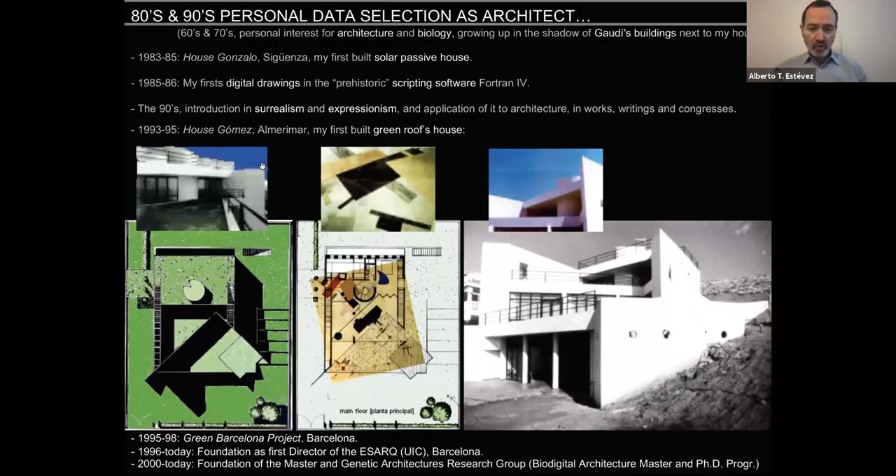As in the next slide, I explain what remains now for biodigital architecture. These words are, of course: Gaudí's buildings, architecture, biology, solar passive house, digital drawing, scripting, software, surrealism and expressionism—this gives a kind of definition and background about what you can do and how you can interpret biodigital architecture.

But the first point, or the main point, was when I was beginning the change to biodigital architecture: founding the School of Architecture where I am teaching, and later, 20 years ago, founding the Genetic Architecture Research Group and Office, and the Master of Biodigital Architecture.

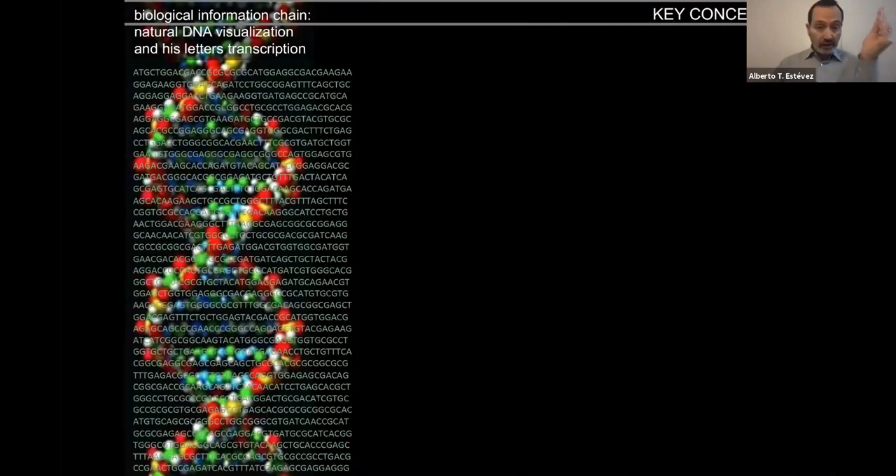So to explain what is behind all these points that we will see, a key concept is that living beings work managed by DNA chains, which at the end are information chains that today you can transcribe into a kind of code that later you can also translate to zeros and ones.

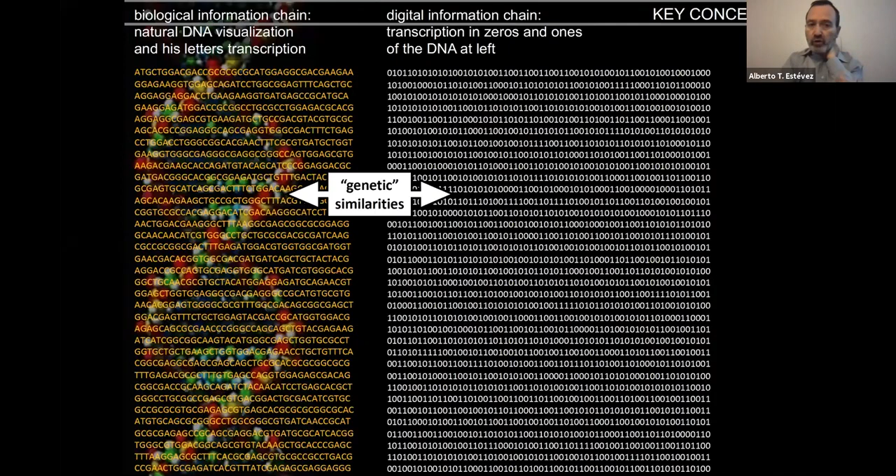So today we have something very important: the possibility to link DNA codes and digital codes. This gives us a kind of genetic similarity—living beings work or are controlled by this kind of natural software, and digital beings, what we can design and produce in a digital way, are also defined, controlled and managed by a kind of digital DNA, so to say.

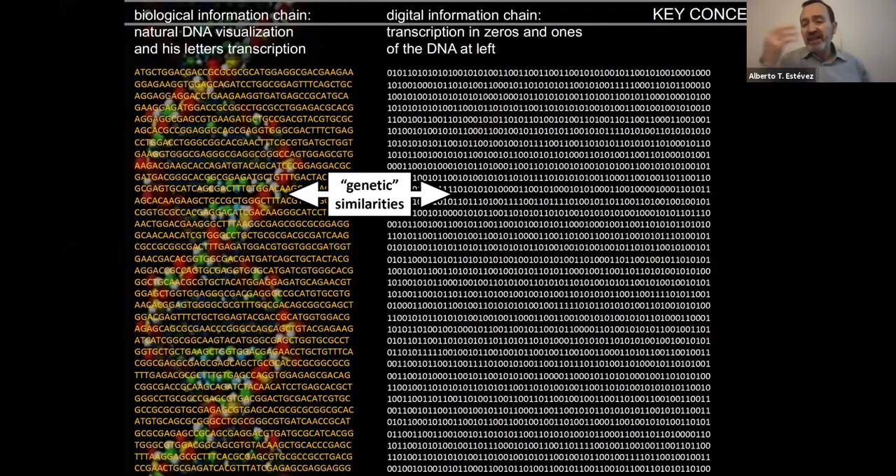This, of course, is not so easy, but it takes us to a position very, very different in the history of mankind. During thousands of years, people could only work on the surface of things. But now with genetics, we can work at the intramolecular level, so that if we have control of the order of how things grow, how things live, which functions they have, this gives a very, very big power and difference compared to what we could do before, which was only working on the surface of things.

As I tell you, it's not so easy, because you first need to have this interactome map. That means you need to know exactly which genes work with which genes to produce different functionalities. It's not so easy, of course, to control, but thanks to bioinformatics, it can be done.

It's only a question of research. So understanding these two points: the possibility to work with bioarchitecture, living beings that grow in the way we need for our purposes, and also knowing how we can manage digital architecture, designs that digitally can produce something with machines, with CNC machines, with 3D printers, etc.

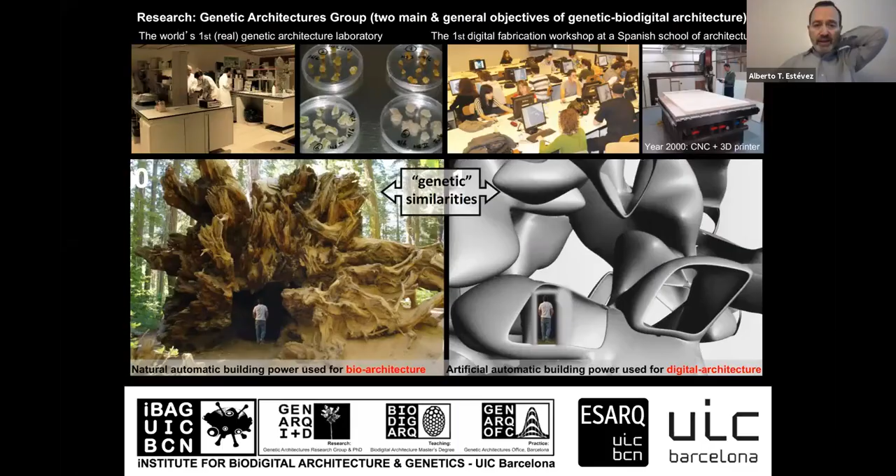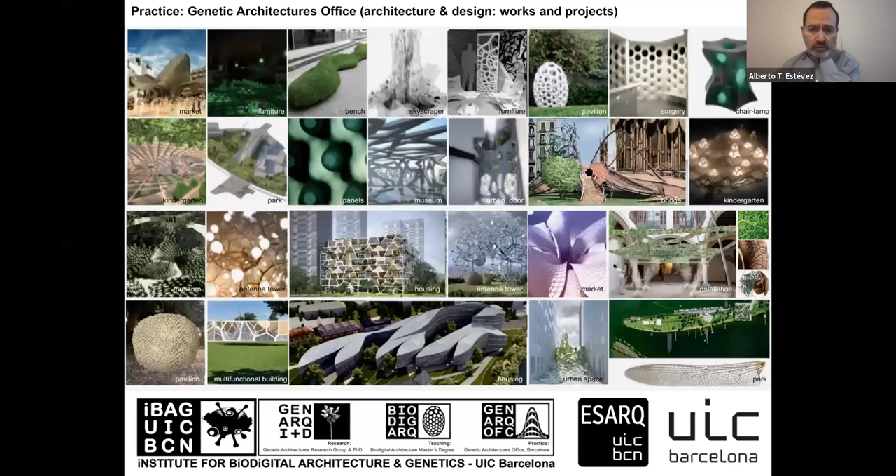From one side, in the office as practice, as architecture and design. Here a lot of little images of projects: a market, furniture, benches, skyscraper, pavilion, bridge, door, museums, housing, etc. And also from the research and from the practice, we are teaching in the Biodigital Architecture Master.

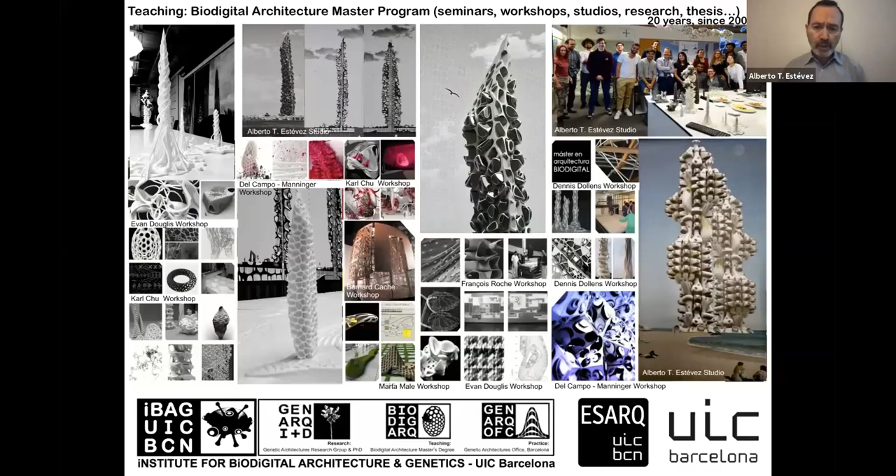I want to tell you about this institute, the Institute for Biodigital Architecture and Genetics, which has three branches: the branch of research, managed by the research group Genetic Architectures; the branch of design practice, managed by the Genetic Architectures Office; and the teaching branch, the Biodigital Architecture Master. These three points are what we are doing in Barcelona, following these ideas.

And of course, we are in Barcelona, so the big advantage is that we have Antoni Gaudí and all the works of Gaudí, and Salvador Dalí, who described the works of Gaudí as really a kind of surrealist architecture. We also have in our institute philosophers speaking about the emergent character of life, about complexity theories, geneticists about genetics, and of course sustainability as the main justification for all this.

Understanding that our cities need to take advantage of this power of nature and this power of digital technologies, this is what we are working on now.

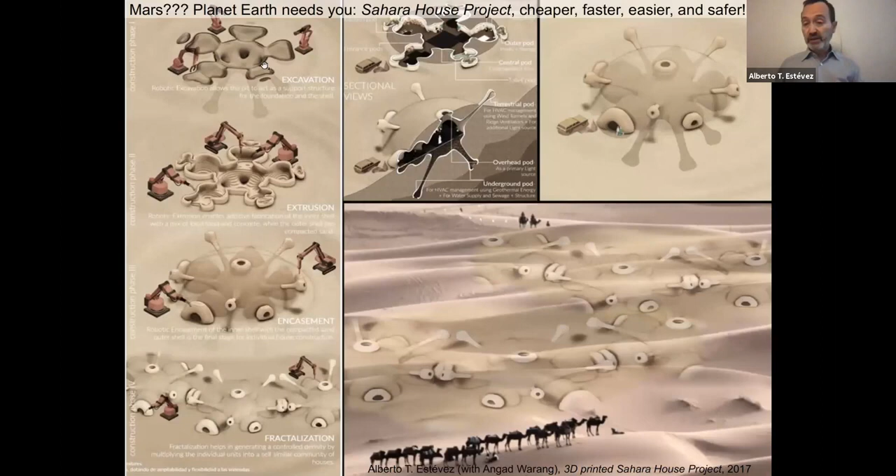In this sense, we were making a little project about 3D printed houses, with the same resources that a colony on Mars would be built with, the same technology etc., but 1,000 times cheaper. We were making this project for building houses in the Sahara, for example.

Because the point is, if we don't begin to think how to really solve our problems, not thinking about problems that are not so close to us, what will happen with our planet at the end? You see the movies Blade Runner 1 and 2, that are prophesying a kind of planet that will really be in trouble if we don't begin to do things that solve this. But now this is happening all over the world.

This is the city of Mexico in America, this is the city of Hong Kong in Asia, this is the city of Barcelona in Europe. Everywhere we have the same problems, and sometimes our problems make travels to people that are very, very ecological.

For example, in New Zealand, the most ecological country, they cannot go to the beach without all the clothes, because the ozone hole is exactly in the position of New Zealand, and they have the highest rate of skin cancer in the world. So our bad behavior toward the planet goes to other places that have better behaviors.

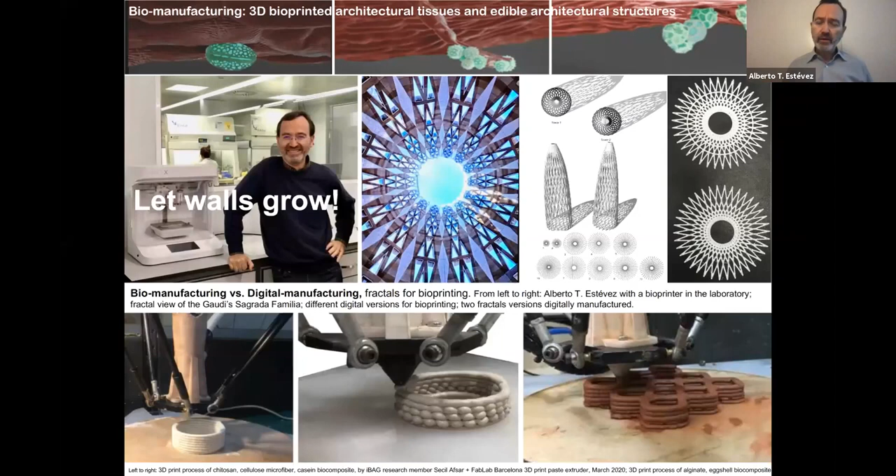In this case, it's Professor Yomna Abdallah, who is working with me very closely researching these points. And here we also see the possibilities of working with edible materials, so that we can also think of edible architecture.

All this, I was proposing these comparisons between what was normally proposed in the 20th century and what we need to propose in the 21st century.

So in this case, it's a sporopollenin house. That means that sporopollenin grows as a space, a house that can be habitable, taking into account that sporopollenin is the most durable organic material that grows by itself.

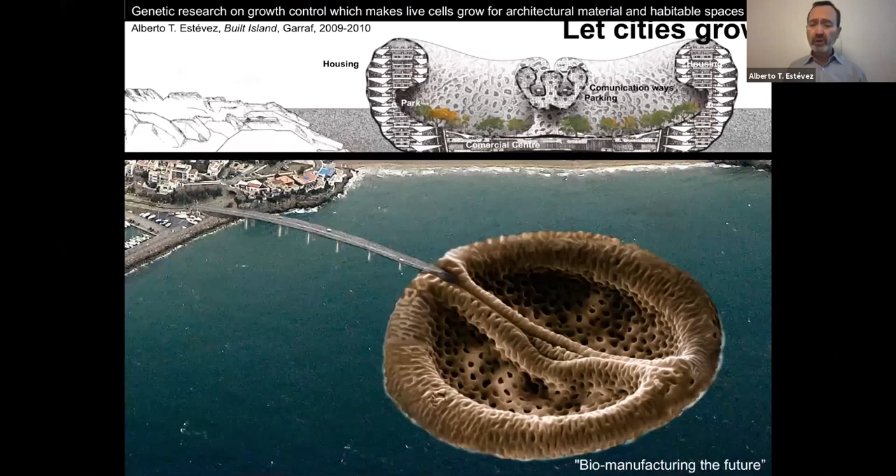So it can be a good understanding of this idea, letting houses grow with the power that nature gives us, letting cities grow, whole cities, or even letting planets grow, because now with genetics we can think of research that includes not only building with living cells for walls, houses, cities and landscapes, but also making satellites of living cells around.

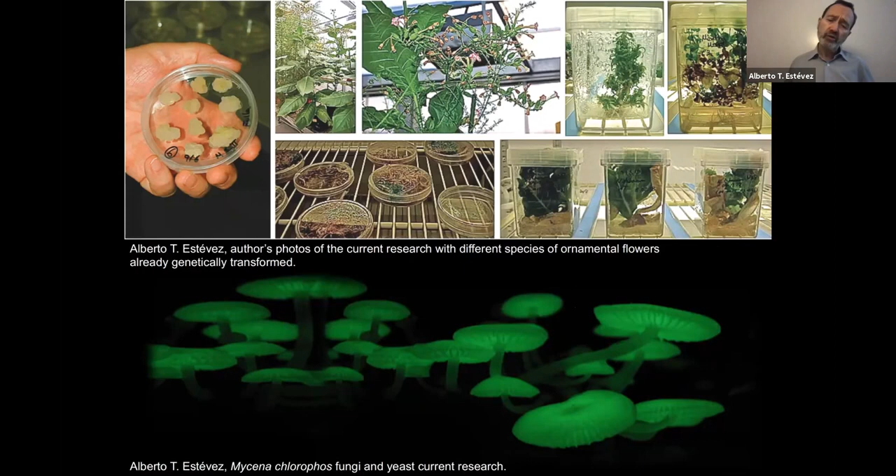And a third phase was working with the genes of this bacteria, but putting it in ornamental plants, so that we can have at home or in the balconies or in the parks, plants that also give light in a natural way. And a fourth phase will be using the genes of the most luminescent being that exists, this fungus, whose genes responsible for luminescence can organize better illumination for what we need.

Of course, also with the challenge to build beauty, because as architects and designers, what we need to do is make people happy with buildings that are beautiful. If not, it's making a bad behavior for us as architects. So this is the idea of knowing the secret laws of the universe, and applying them to architecture and design in our case.

This takes me to use the electron scanning microscope, and so I was researching the microscopical structures. The point is that the amorphous forms of cells begin to organize into structure. So the first structure of how cells understand that they need to resist external forces are these that you can see with the electron microscope.

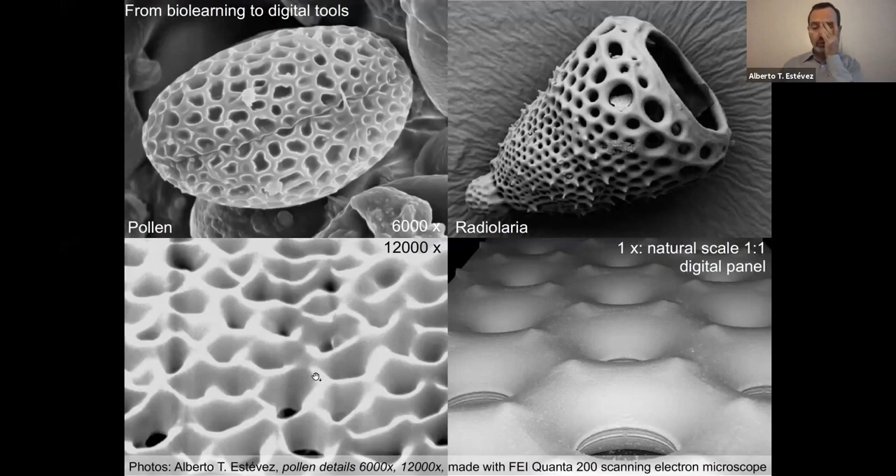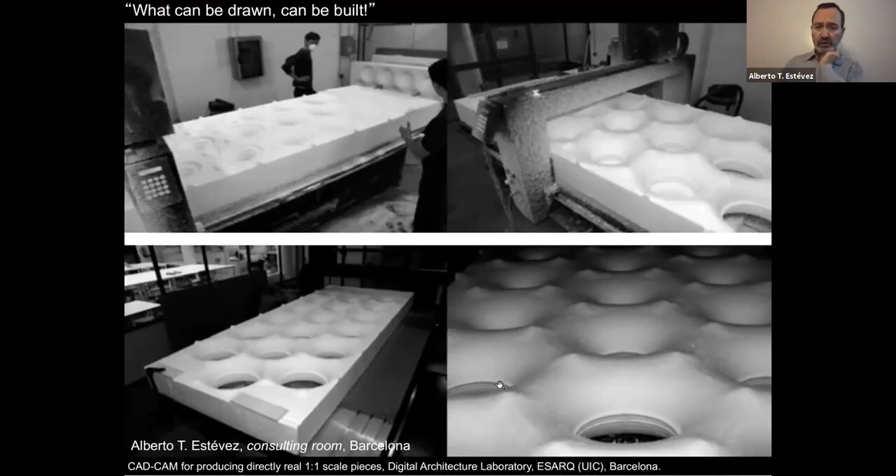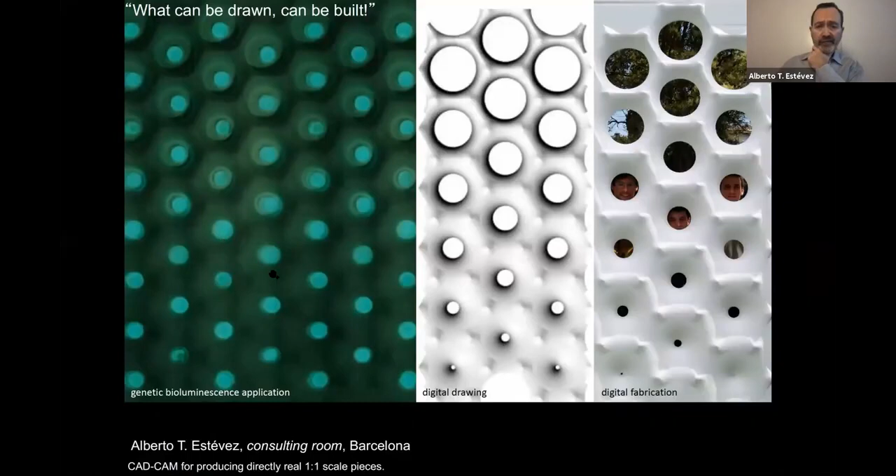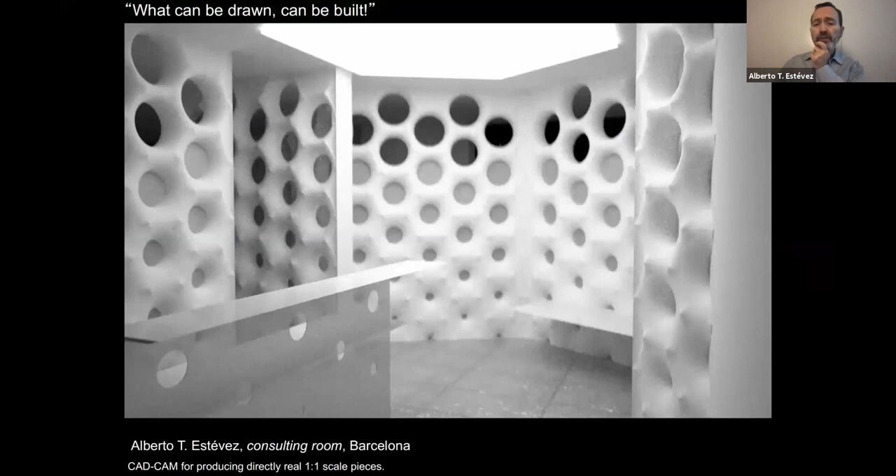I was researching, for example, structures of pollen, and later trying to digitalize it and to print it or cut it or fabricate it with digital machines. In this case it was a kind of panel that was applied for a consulting room. And here at left is the same panel with the bio lamps I was showing you before. The consulting room was organized with these panels manufactured by CNC machines.

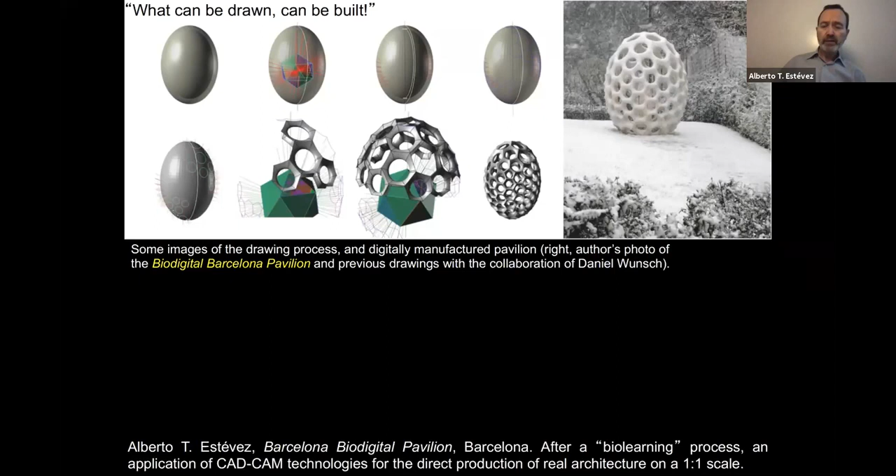And also later trying to do a pavilion using the same understanding of pollen and radiolaria structures. It's curious to see that vegetables and animals have, at the end, the same microscopical structures, and the same non-microscopical patterns that are equal for all living beings that you can find.

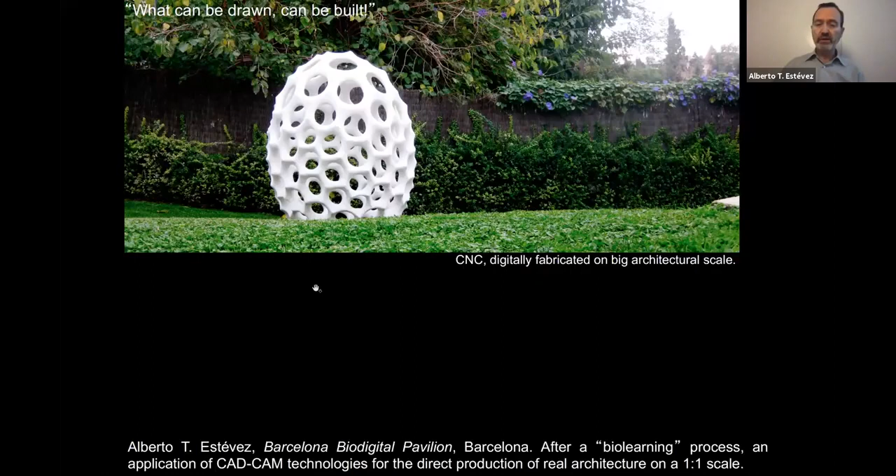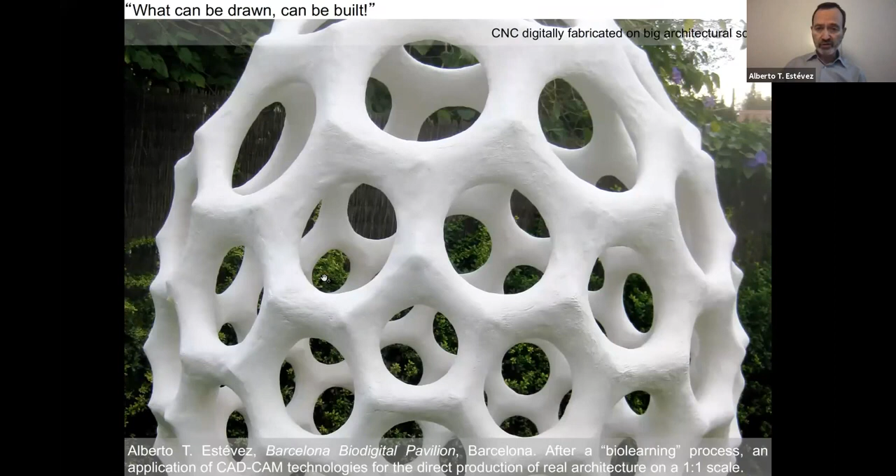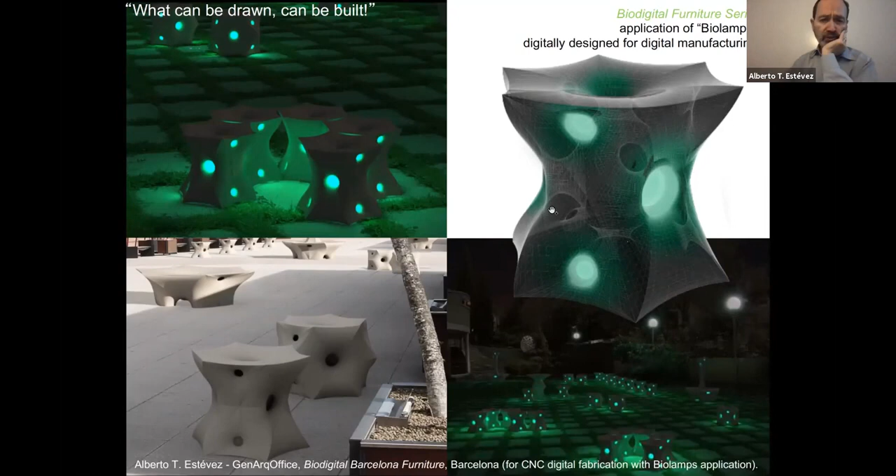And in this research, we were also producing this little pavilion digitally, with the advantage that digitally you can scale it to different scales. So we were also doing little lamps, a series of digitally fabricated lamps, but also I began some years ago a series of furniture for 3D printing. And as you see here now, 3D printed, in this case in the garden of our university.

The point is that all this series, as you see, has a kind of complex geometry that in the end you can only imagine, design, or produce if you are doing it digitally. Here we have what I call the radiolaria furniture series and the hyperboloid furniture series.

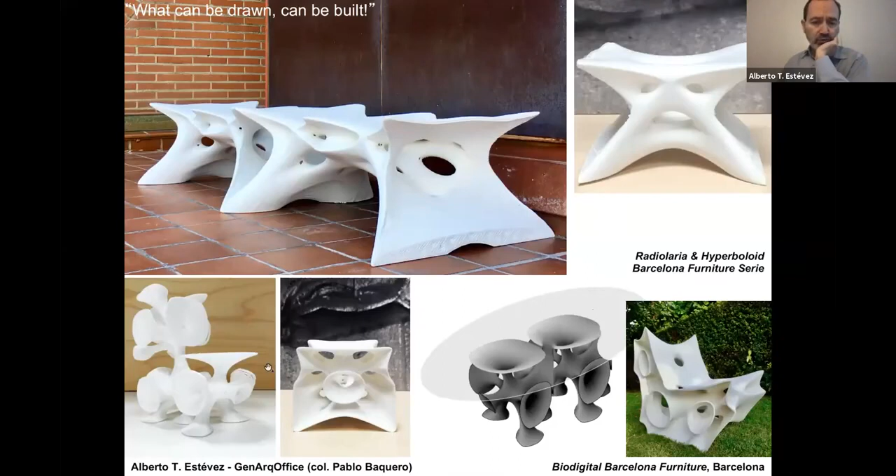And this is related to what I was saying in the first slides, when I told you to hear the zeitgeist: what's happening in our times, with which technologies, ideas, and concepts we are counting on, and what is the challenge to take a step forward to the frontier of knowledge, and not to be too comfortable working as 100 years ago Mies van der Rohe and all the modern architects were doing. So this is our challenge: to see what are really the designs and the architecture that our times need or deserve more.

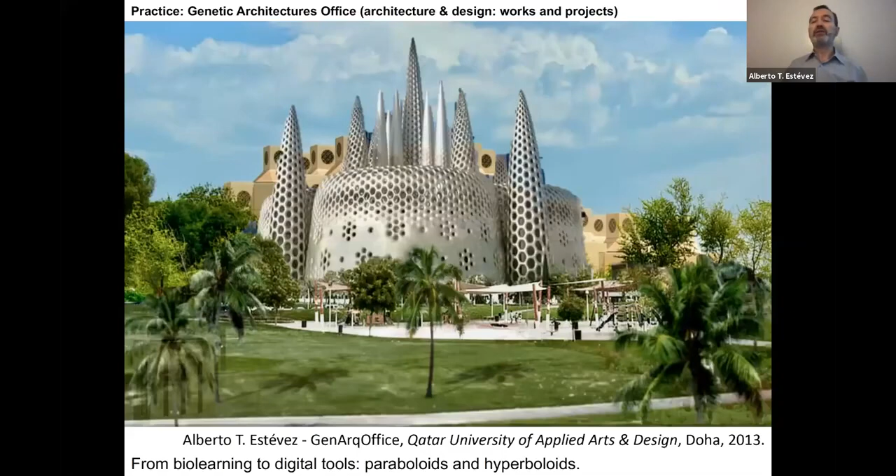And in this case, this takes us, of course, to geometries that can only be managed by digital tools. And what digital tools allow you, this is what you can really propose.

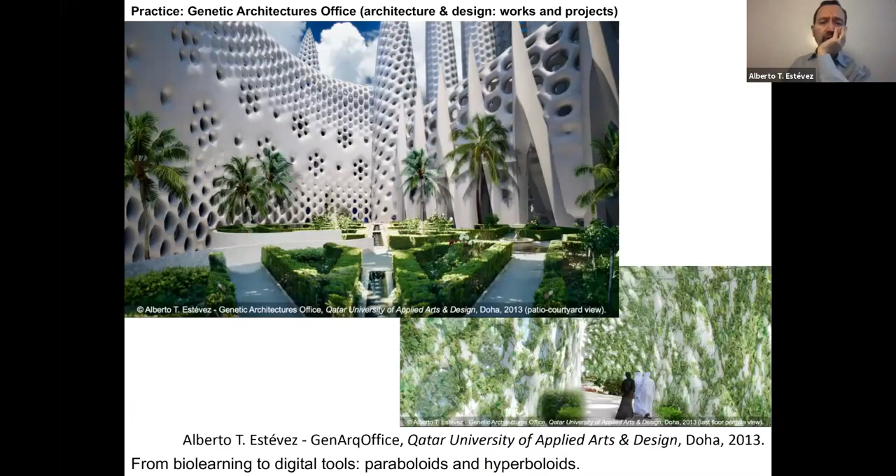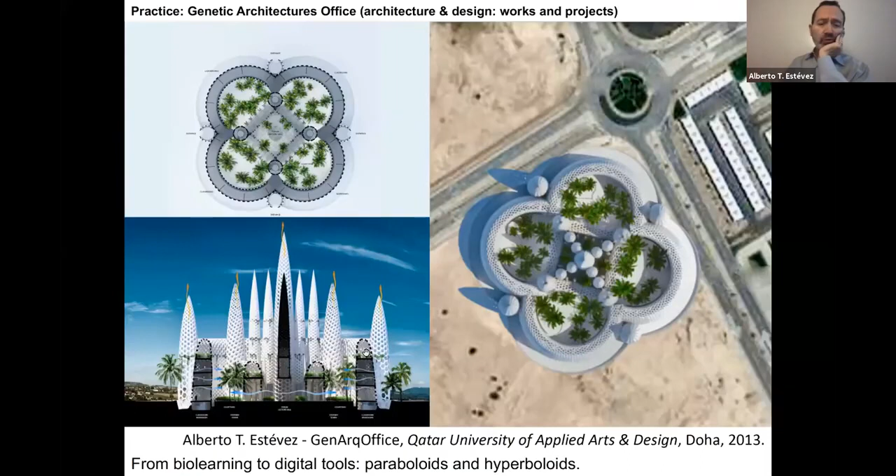This was for a university there in Qatar, and that was inspired by a little drawing of Gaudí that was making a kind of little schools for in Tanger. But from this drawing, we propose a more actual project.

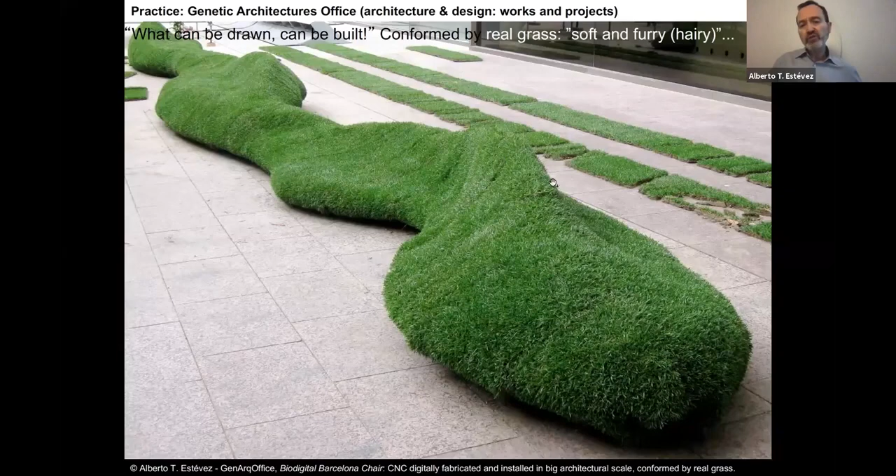And here another bench that we were producing in this idea of what can be drawn can be built. So at the end, if you are able to draw something, you will be able to build it. And only taking it as what is the most tension that you can introduce in the concept of things. And in this case, also mixing with real grass, so that the point is very comfortable, that the people can sit, can sleep, can rest on real grass benches.

But if you think that everyone is in different positions, and you take all these positions together, and you make a fusion of the positions, in a way that only digital tools can do. So you have, again, this step more, as the hyperboloid chair that I explained to you before, that only with digital tools you can conceive, you can design, you can think, you can manufacture these designs.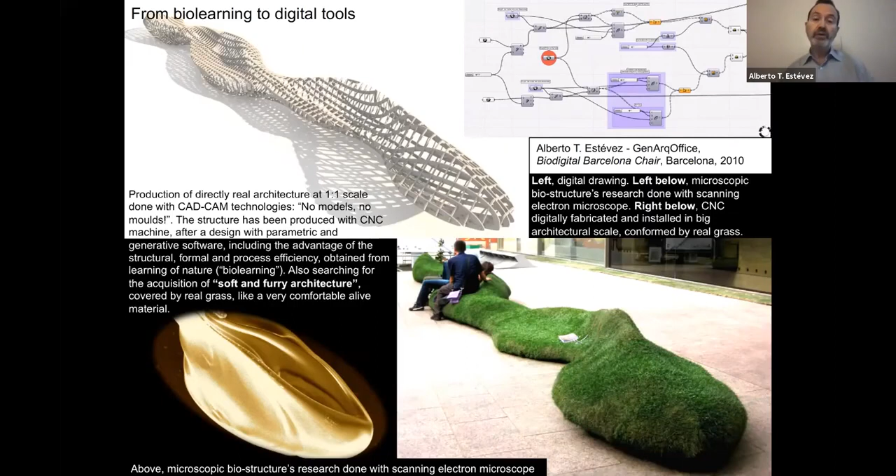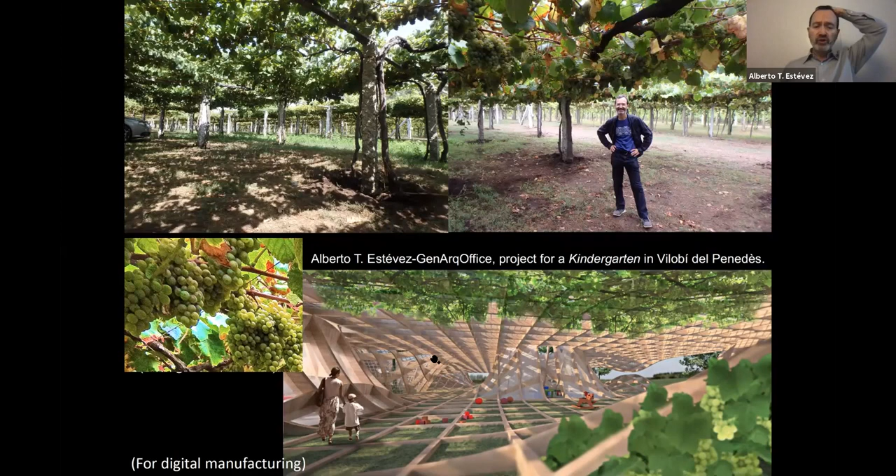Another building was this kindergarten that was in a place of wineries, very famous for wine, and taking the fruits for the wine, the grapes, it's this way to put it as a kind of roof. And I was thinking that it could be a nice environment for the children to have this roof, and also take it from the structures, the microscopical structures.

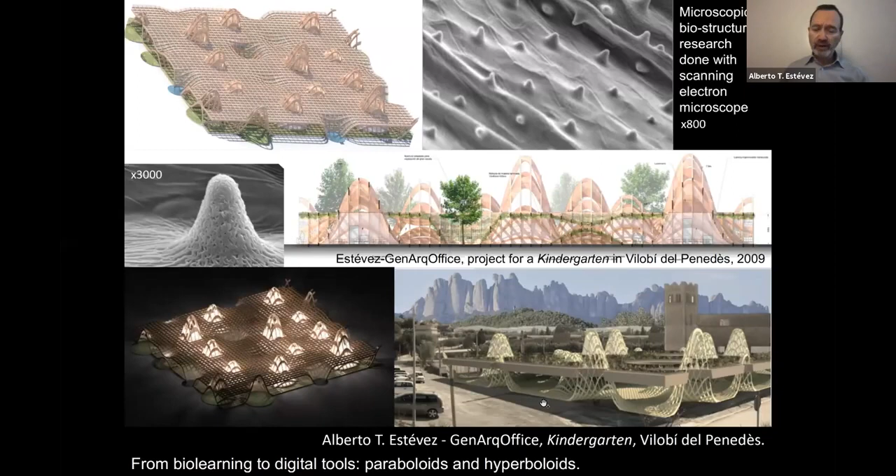In this case it was from a kind of leaves that give us the possibility to think in spaces, in paraboloid spaces, and in the middle, this green roof of grapes, in a way as the Montserrat mountains that we have close to Barcelona are also doing in stone. So it's a kind of relation of this digital manufacturing structure for the children.

And we were proposing to the architect director of the Sagrada Familia, and he liked it a lot. But let's see, we were proposing all these designs of paraboloids, hyperboloids, etc. That also digital tools allow us.

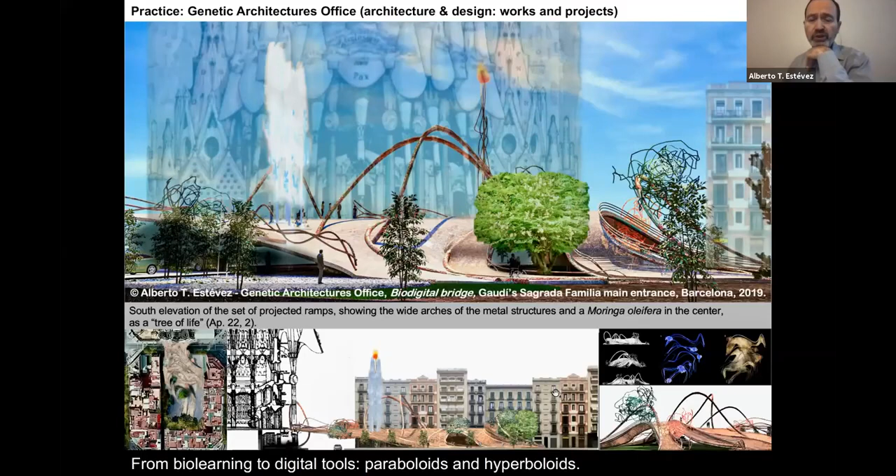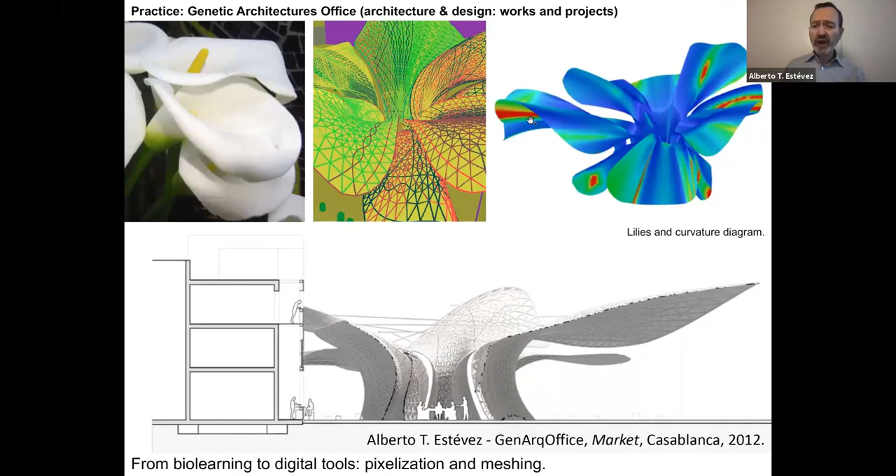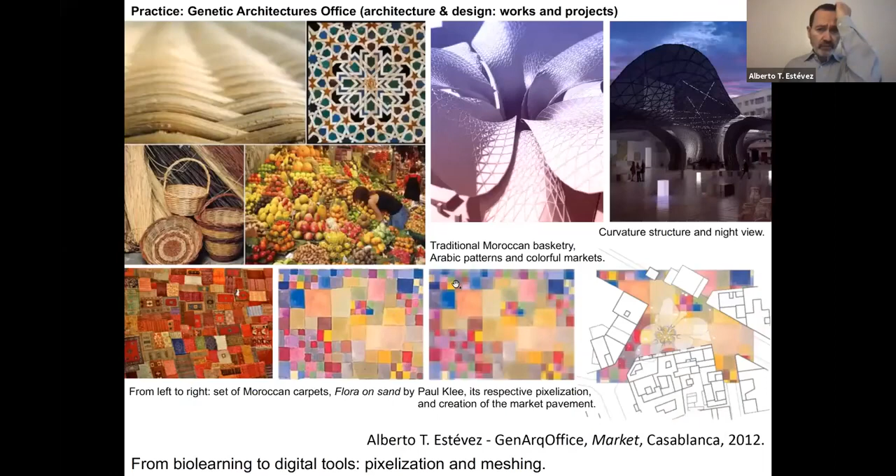And also organizing this with this kind of canopies with tensors, so that this basketry type of canopies, as lilies for example do in nature, are more interesting to have a free space around, as you see here, to have a big free space, and with these basketry canopies provide the shadow and make the space.

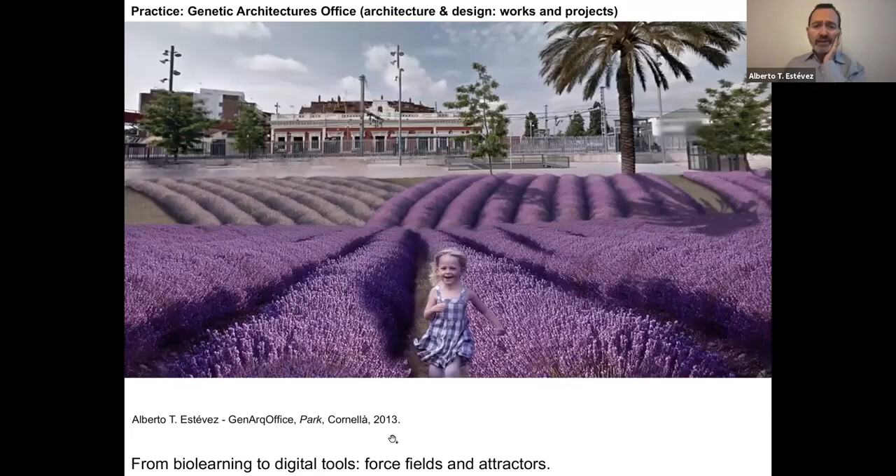Another project, in this case with other possibilities of digital tools, organizing designs with force fields, with attractors, was a park in Cornellà, close to Barcelona, that again, as you can see for example in the grain of wood, how these lines are so similar to magnetic lines, and how digital tools allow you also with these attractors to organize an absolutely harmonic design.

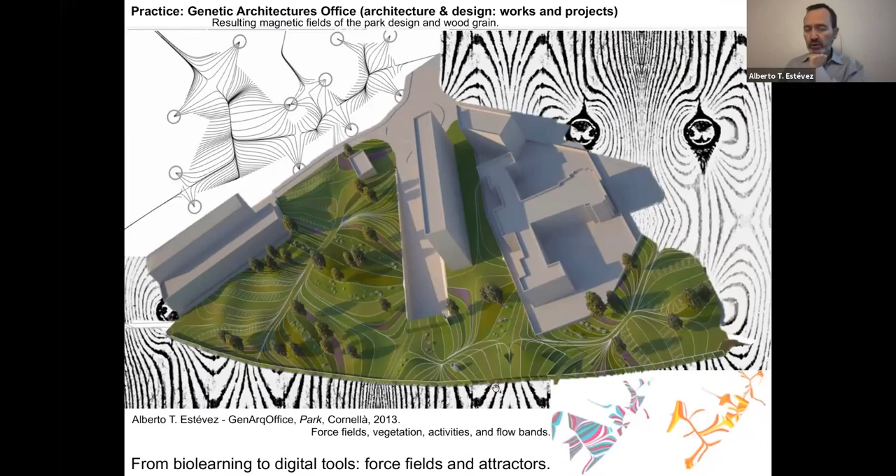So of course, following the vegetation or the activities, the flow bands that are organized here, or the organization of the parts or of the ways, but being sure that every line, every little curve here, because it's managed by digital tools, has an intrinsic harmony in all of them.

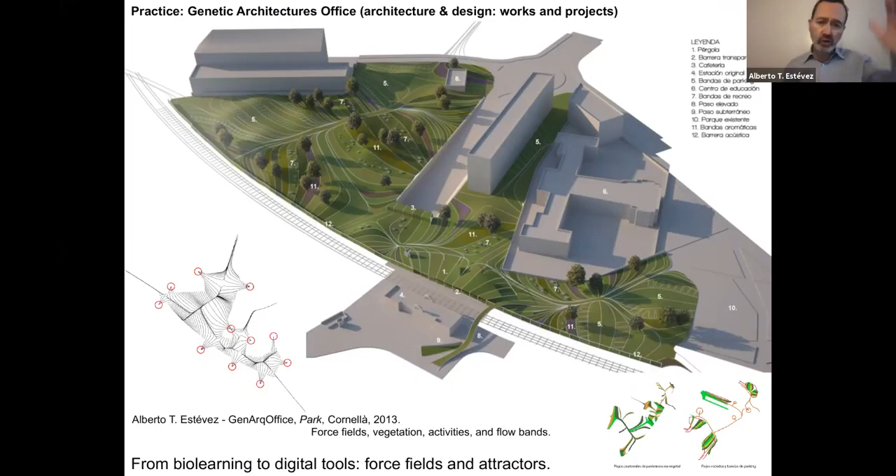This is a big advantage of digital tools: we no longer need to be Michelangelos or Gaudis to make something absolutely harmonical. We only need to use digital tools and the possibilities that digital tools offer us.

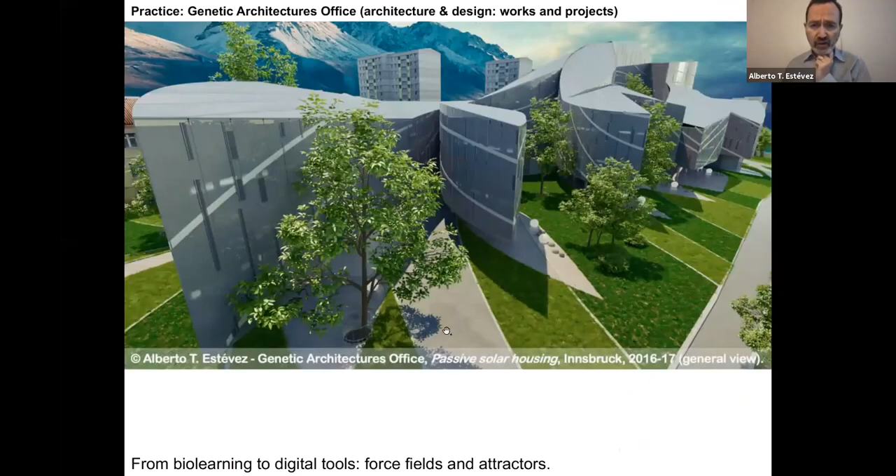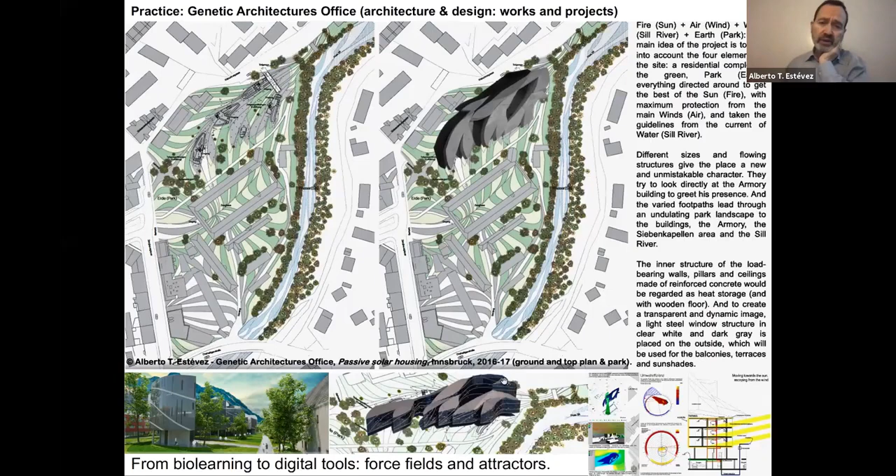Also with force fields, I was organizing this solar passive housing design and all the park around, so that how the park and the green flow is how these housings also come, following the sun, searching the sun for every apartment to have a winter garden with the possibility of passive solar housing.

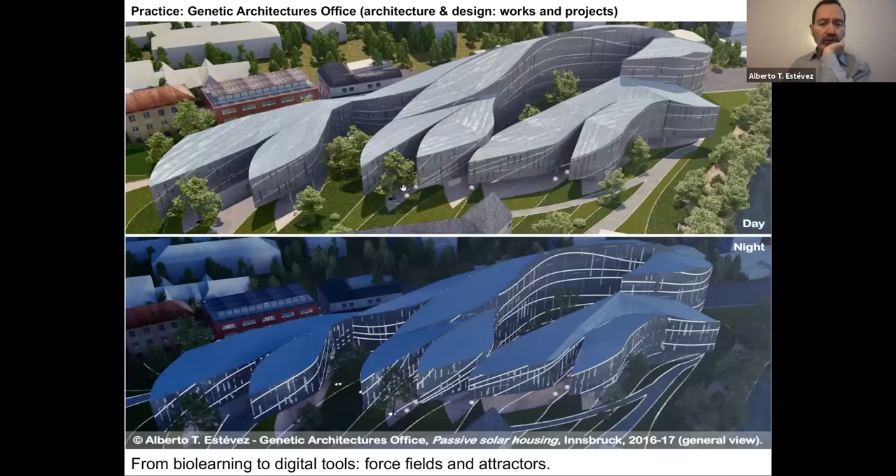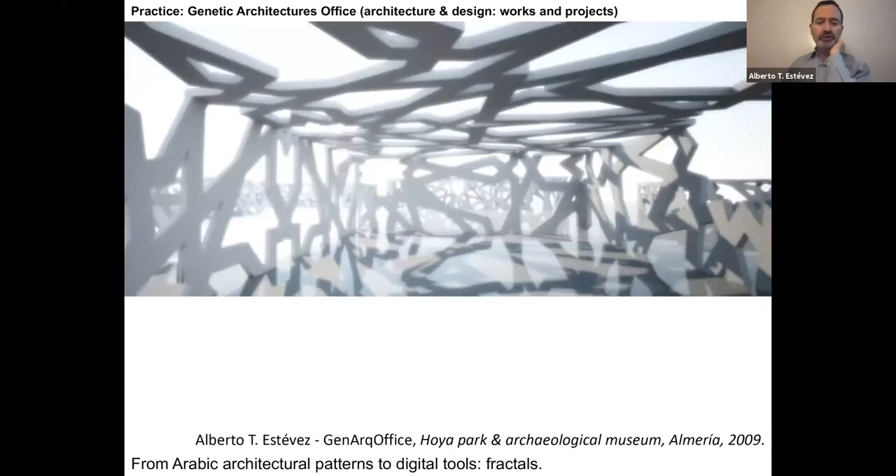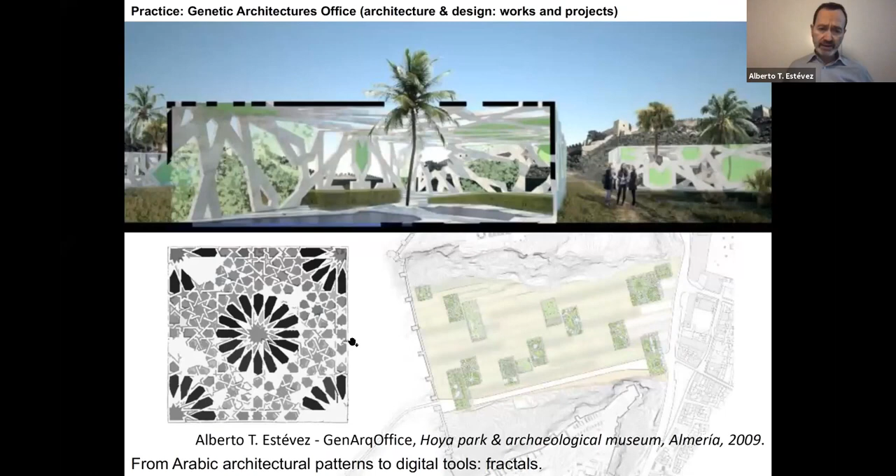Another design was for this museum, using the possibility of fractals, because Arabic architectural patterns give us a kind of fractal geometry. This case was also a big park with archaeological sites that we needed to preserve, organizing little pavilions to preserve these excavations.

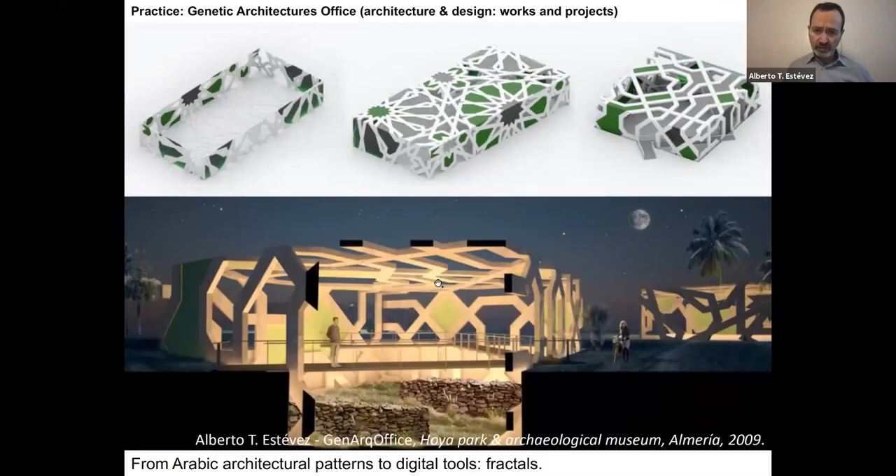And all was organized by these patterns, with the idea of fractality in the geometry of Arabic patterns. Now another possibility with digital tools is fractals, because fractals are common in nature too. Everything in nature is organized in fractality - the big forms follow little forms that follow microscopical forms, and with three levels of fractality, nature arrives at a very efficient structure.

In this case, we were designing a kind of telecommunication antenna. Normally antennas are vertical towers, but in this case I wanted not a vertical tower but a kind of light crown. By night it will be illuminated, and by day these balls are solar collectors, because the idea was to organize not only an antenna but a self-sufficient fractal machine for purification of air.

The point is that first there was a study of fractality of this plant, the diente de león as we say in Spanish. The fractality that we can see in this little plant was reproduced in 8 levels, following the law of fractality until having a whole dome.

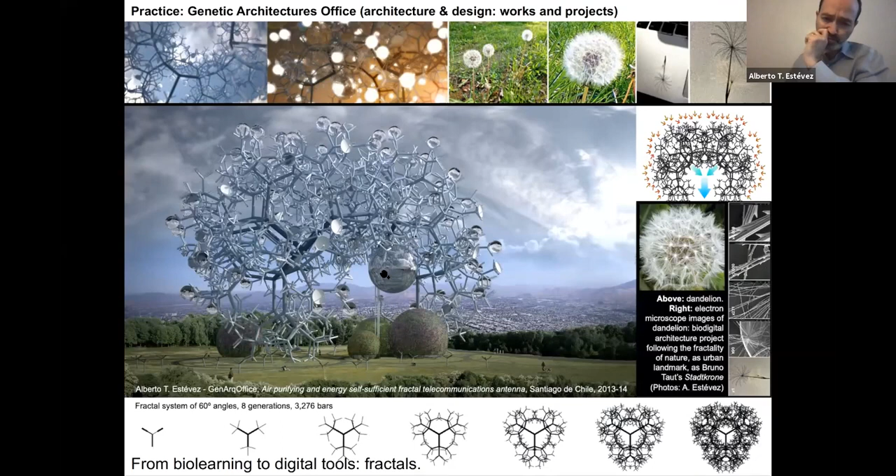Of course, it's not to arrange all the contamination of the city, it's only a kind of symbolic machine, taking the air through all these tubes, with filters inside, having purified air in the middle, where people come to the restaurant to see the views from this mountain, etc.

But we go now to another kind of possibility that digital tools allow us: Voronoi. Voronoi is really a fascinating kind of structure that allows efficiency in structures, in behaviors, in functionalities of plants and animals.

You will see that plants and animals at all levels of scale have the Voronoi pattern. For this design, a multifunctional building and park in Austria, I was taking the idea of Voronoi to organize diversity, spatial richness, hierarchical paths, as we learn from nature - this is all the time the sentence I put below: from biolearning to digital tools.

With biolearning, learning from nature, nature teaches you this kind of harmonical organization, a more efficient organization with hierarchies in the structure - a primary hierarchy, a second hierarchy, what is organizing surface, what is organizing structure. This lets you organize something more complex thanks to digital tools, and complexity takes interest and attraction for human perception.

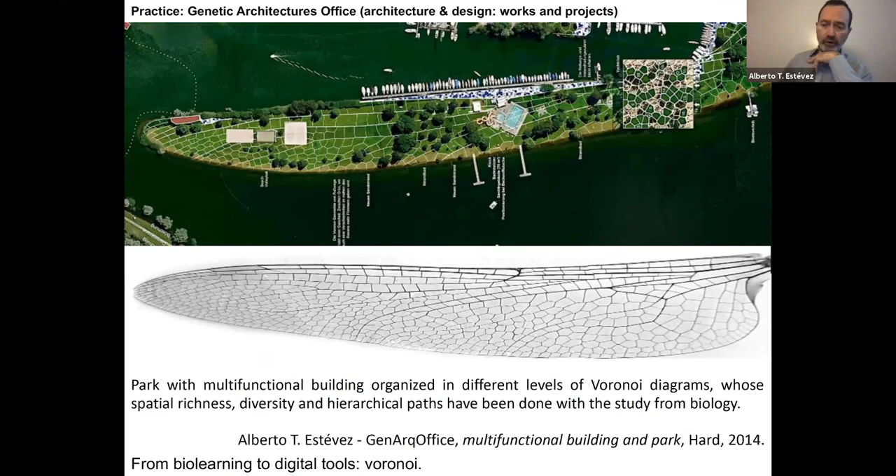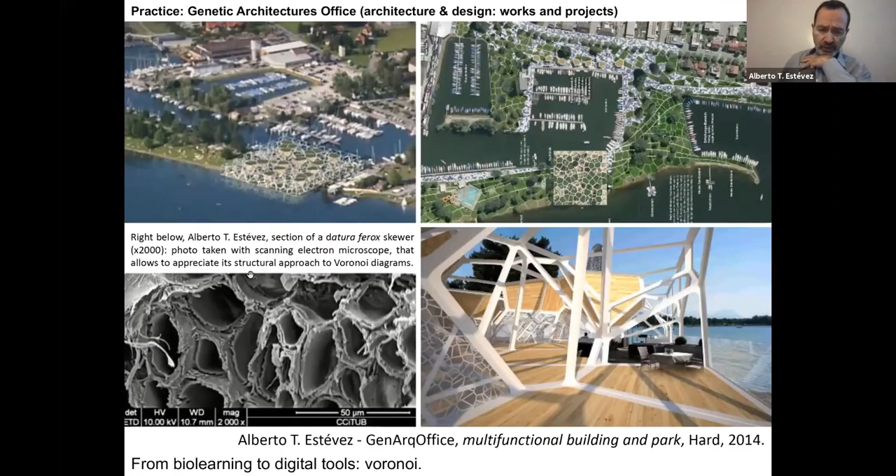In this case it was also the whole organization of the streets, the squares, the haven, the port, and also the building, every time looking with the electron microscope to the Voronoi structures. With the same Voronoi idea, this design was also solar passive housing, organizing this whole building from one side as Voronoi structure, but also as a self-sufficient house.

So to say, as was the antenna, because for sustainability we need to think that everything we do, we need to implement in self-sufficiency.

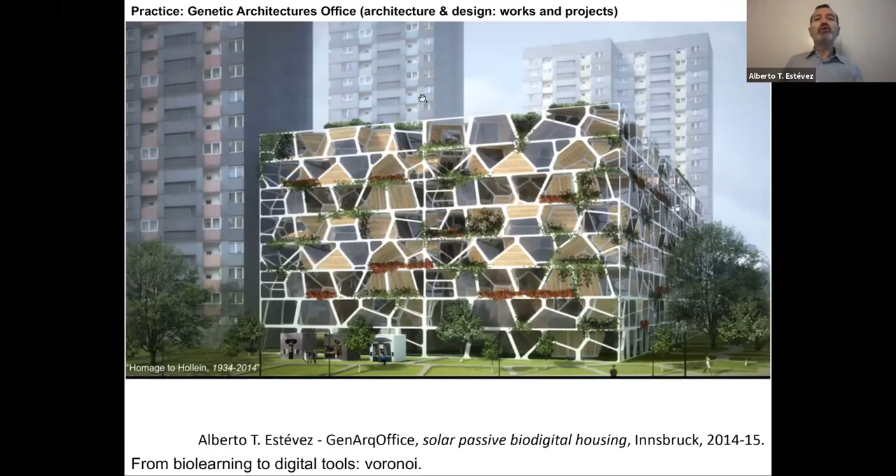So in this case, using urban agriculture, urban beekeeping, and having little shops to sell the flowers, or the vegetables, or the honey that the bees produce, all in this building, which in the middle has hanging gardens, and here also the diagram of the solar working.

Here you see the different Voronoi structures. In this case, from a rose petal at 800x magnification, or here of pollen. You see that for surfaces like a rose petal, or for pollen, it functions very differently - one is on a surface, another is a volume. Or here, if you cut a section of a cactus, you can also see the three-dimensionality of the Voronois inside the Voronoi tubes of the cactus.

So this gives you the idea of how we need to think about our structures, since nature is telling this to you.

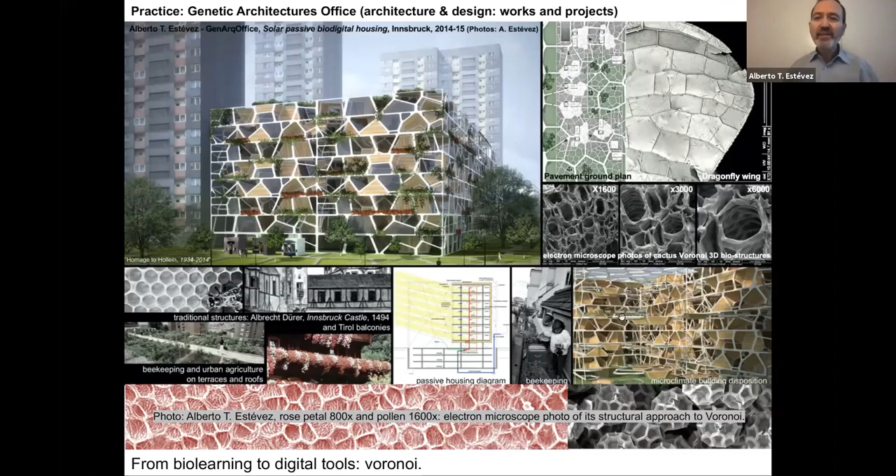Someone is, but I don't know how to do this because someone is calling for questions. Maybe it's better we finish and we have the questions.

Also with Voronoi, I was designing this market. In this case, for Peru, for Lima, you see here also the fractality of the leaves with 3 levels of Voronois, organizing with the idea of the stomatas, which is how leaves are breathing.

So in the same way, we organize a full market that is organized with agricultural roofs, where you can sell in the shops, but everywhere, as you see, the shops are around patios, specialized patios, but also between the shops are the smaller patios.

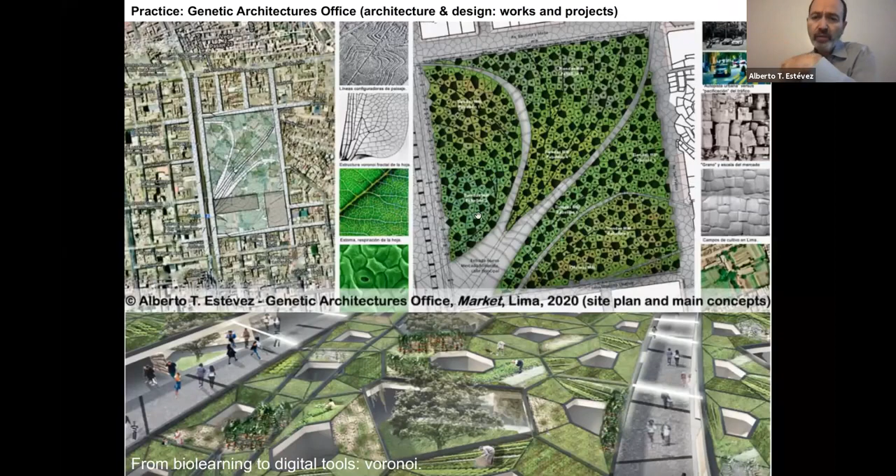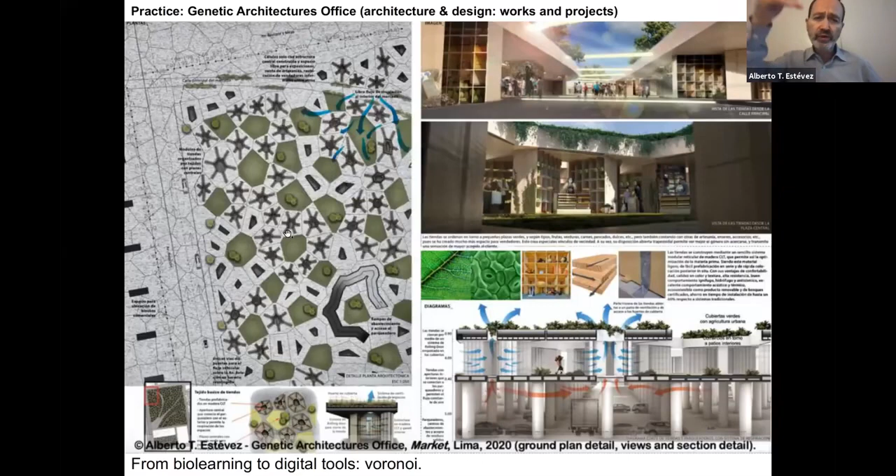For bread. So we have a kind of structure, as you see here, with shops around little patios to oxygenize, to have the circulation of air from the bottom of the parking to the roof, so we ensure everything is very good with the air around. There are little patios, but also bigger patios around for more social possibilities, with different organization levels of fractal Voronois, as I was explaining to you.

And now also we are in the last part of this little speech.

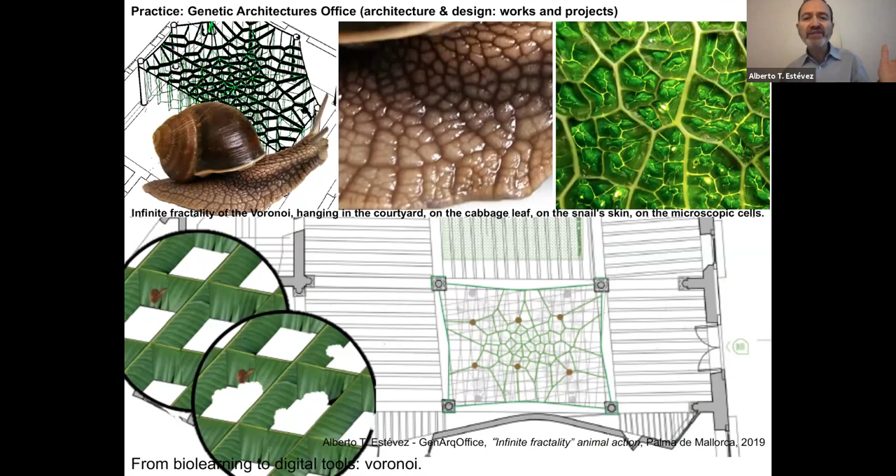So this fractality that we call in the installation 'infinite fractality' - we let the snails begin to eat here, as a way to explain what will happen to us if we don't begin to think about where we are, which is our environment.

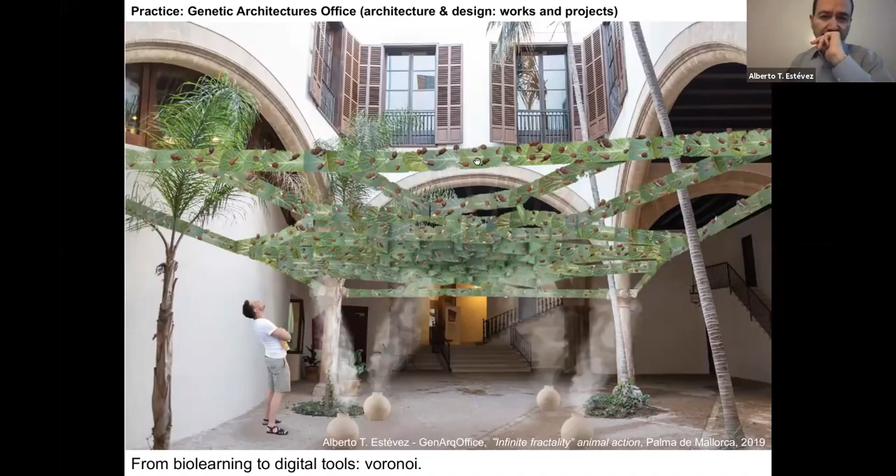These snails, of course, will eat so much until they finish with the leaves, and the leaves will fall, the snails will fall. Well, it's as I told you, it's a kind of little metaphor about our planet, snails, and fractalities.

Thinking about the problem when all the people were closed in their houses, and they had no balconies, they had real problems compared with people that have terraces or balconies. So we were designing a kind of Voronoi balconies, very light structures that we can hang directly on the facades of houses that maybe don't have balconies or terraces, so that people can be a little more happy in this moment of COVID.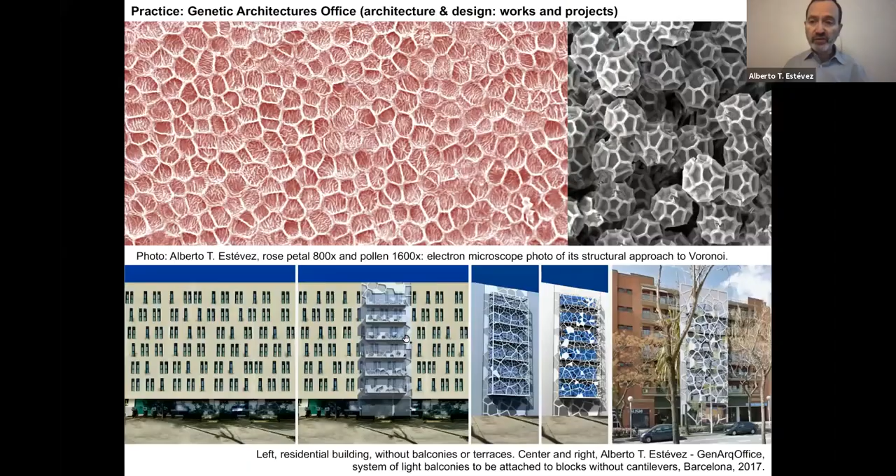And also because of this pandemic, after 2 months when we were closed and nobody was cutting grass or anything in the streets, you know, all these YouTube videos came showing animals inside the cities and all this.

This was a big discovery, because close to my house, all these plants were growing that were never there before. Never had I had close to my house this kind of fantastical, amazing flowers, little flowers, and they only were growing because nobody was cutting anything for 2 months. So this was the action to say, okay, biodiversity and our planet will be very happy if humans don't go out from their homes.